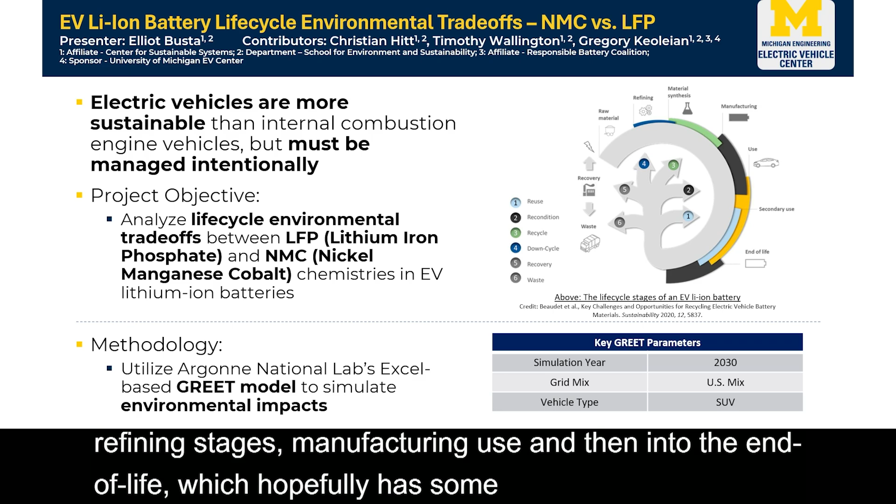So we're looking at, when you stack all of those things together, what does that mean in terms of the environmental impact? We use Argonne National Lab's Excel-based GREET model to simulate these. And here are a couple of key parameters that drive the conclusions that I'll show in this next slide.

So preliminary results in terms of greenhouse gases, you can see on your right, I've got at the top a chart showing the different chemistries across the bottom. So LFP and then different atomic ratios of NMC. And the first thing that we notice is that LFP has lower vehicle cycle impacts. This is the various manufacturing, mining, and refining stages impacts, but it has higher use phase impact.

And the reason for that is because while LFP has lower emissions in the mining and refining stages, it's a less energy dense material. So you need to manufacture more of it, and then you need to cart around more of it when you're driving your car, which leads to lower vehicle efficiency.

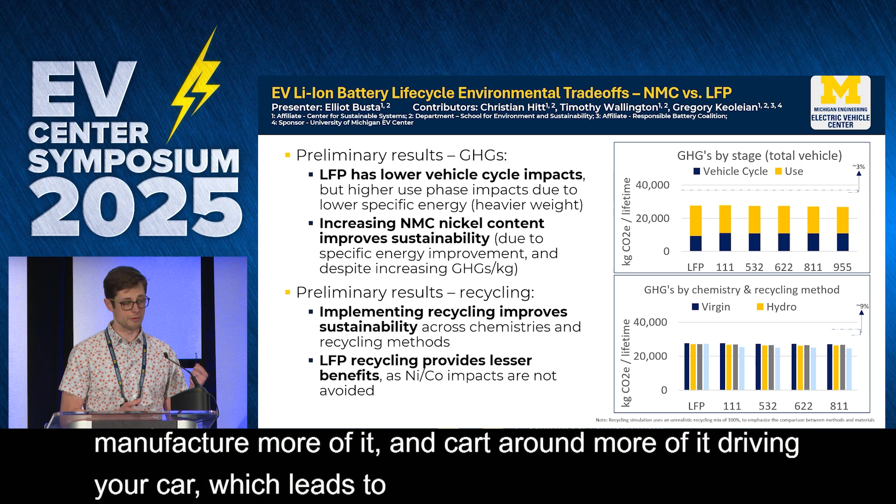The other thing that we found is that as you increase the nickel content in your battery, you actually get improved sustainability. And this was a bit of a surprising finding for us because nickel mining and refining is an emissive process.

And so you would expect that as you increase the thing that has a lot of emissions, you don't get a more sustainable process. But what's actually happening is as you increase the nickel content, you get higher energy density, and that leads to producing less material and moving around less material. And so with moving around less material and producing less material, that overwhelms the emissions aspect of the nickel mining and refining.

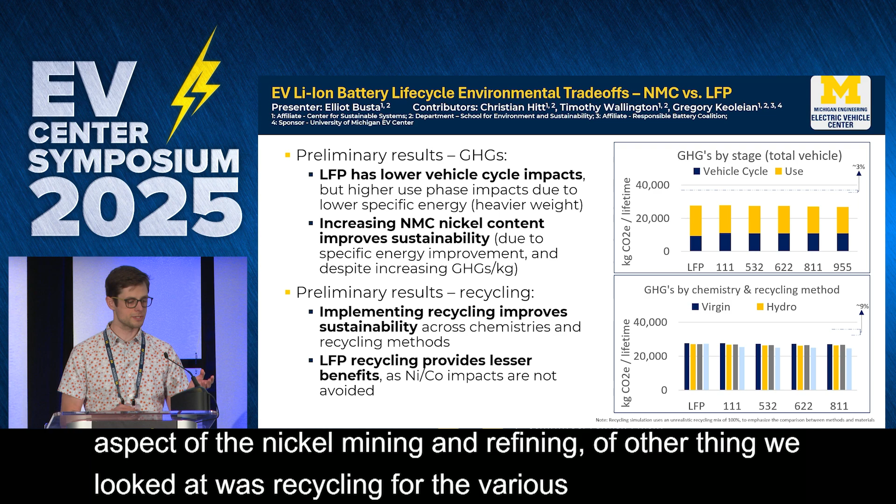The other thing that we looked at is recycling for these various chemistries and for a couple of types of recycling. So I think my legend got cut off there, but these are virgin in blue, hydrometallurgical recycling in yellow, pyrometallurgical in gray, and then direct recycling in light blue. And so what we find is that implementing recycling improves the sustainability across these different methods and chemistries.

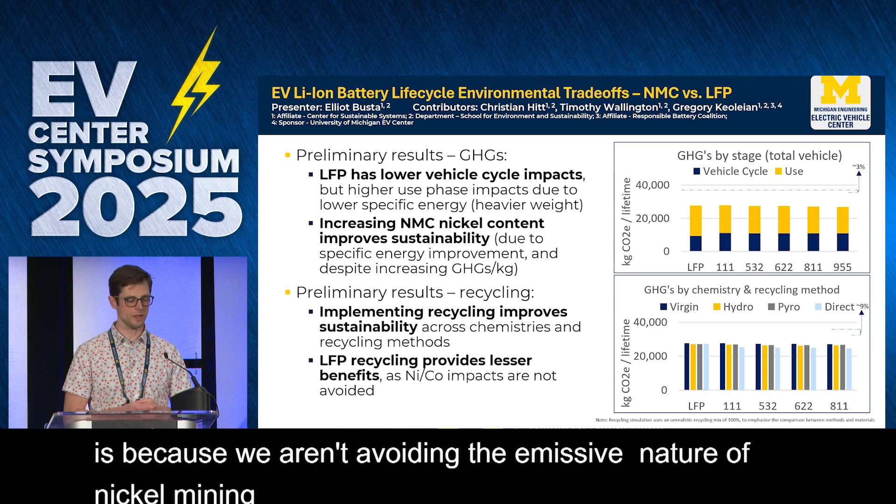And then another thing that you can see is that LFP recycling provides a lesser benefit. And this is because we aren't avoiding the emissive nature of nickel mining and refining, whereas with the NMC chemistries, you are avoiding those. So that's a benefit of implementing recycling there.

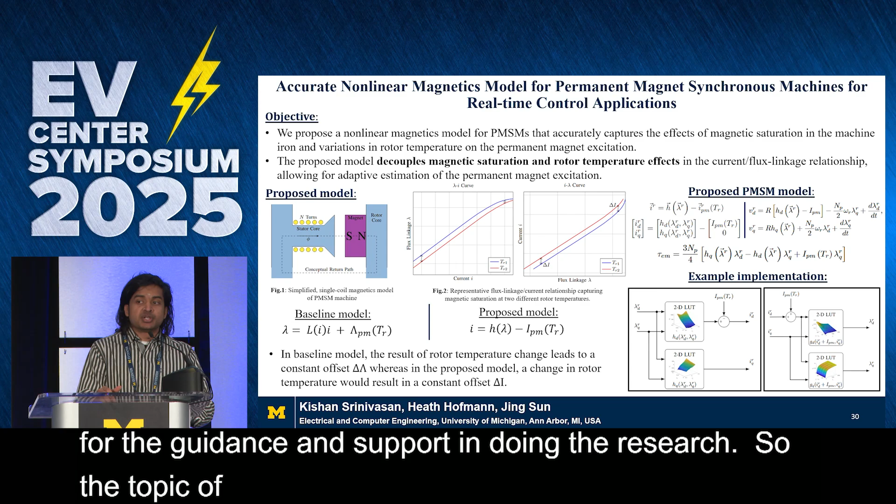So the topic of my talk is accurate nonlinear magnetics model for permanent magnet synchronous machines for a real-time control application. The objective of this project is to come up with a nonlinear magnetics model for permanent magnet synchronous machine, aiming for a real-time control application, capturing the nonlinear behavior due to magnetic saturation and temperature variation of the permanent magnet on the rotor. The main contribution of this model is the decoupling of the magnetic saturation and rotor temperature variation.

Looking at the proposed model itself, looking at the simplified single coil permanent magnet block diagram, the conventional way to model a permanent magnet is to model it as a flux linkage source, which varies with its temperature. What happens when you model a permanent magnet as a flux linkage source is that for a change in rotor temperature, you get a constant offset in flux linkage.

But when you look at the actual nonlinear flux linkage current mapping relationship, especially in the nonlinear region, when you experience saturation, for a change in rotor temperature the offset is no longer constant in flux linkage. So what we propose is to model the permanent magnet as a bound current source, which is again a function of rotor temperature. And what our proposed model predicts is for a change in rotor temperature, there's a constant offset in current, and that's what we observe when we look at the nonlinear current flux linkage relationship. There's actually a constant offset in current.

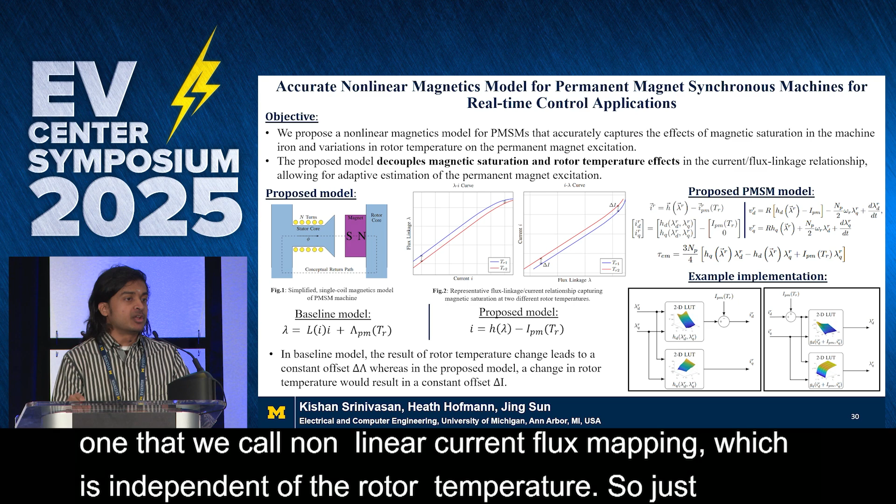Another main contribution is there are two components to the proposed model. One is what we call the nonlinear current flux mapping, which is independent of the rotor temperature, so it just captures the saturation behavior. And then you have the permanent magnet parameter, which is solely dependent on the rotor temperature. So we're able to establish a decoupling between the saturation and the rotor temperature in the flux linkage current relationship. This helps us to have an accurate adaptive estimation of the permanent magnet excitation without additional use of sensors.

An example implementation is shown here on the bottom right figure to illustrate how computationally inexpensive this model is. When you want to implement a flux linkage to current mapping, you have a two-dimensional lookup table, which is the current flux linkage mapping in our proposed model; once you characterize the machine, it becomes a constant that captures the saturation behavior. And then you can have an adaptive estimation technique to estimate the permanent magnet current.

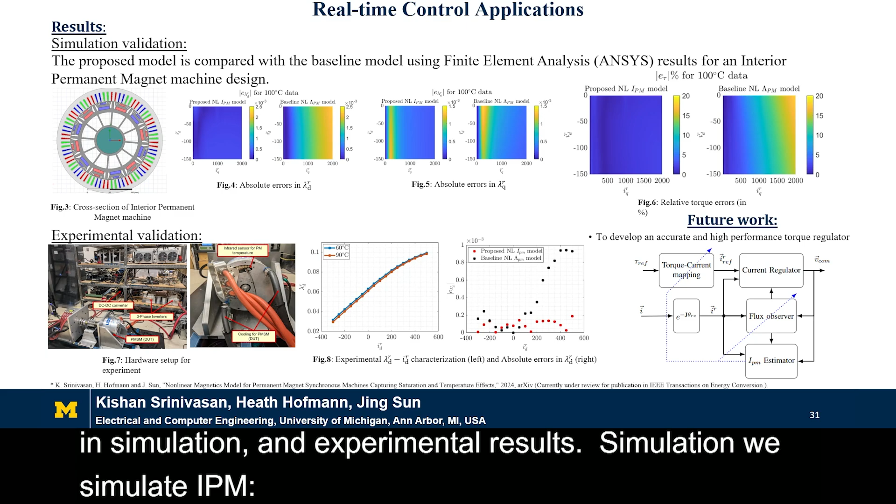In terms of validation, we validate the proposed model both in simulation and experimental results. In simulation, we simulate an IPM, interior permanent magnet machine, using ANSYS and show how the conventional model, which models a permanent magnet as a flux linkage source, predicts the torque and how our proposed model predicts the torque.

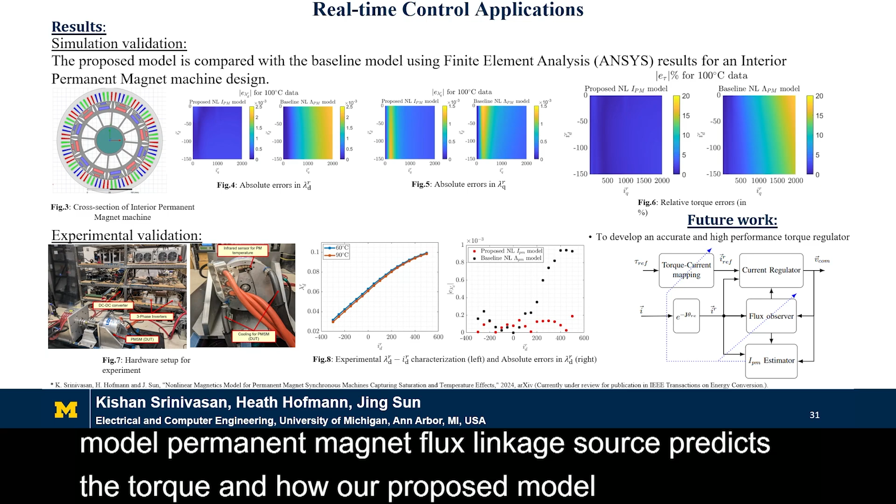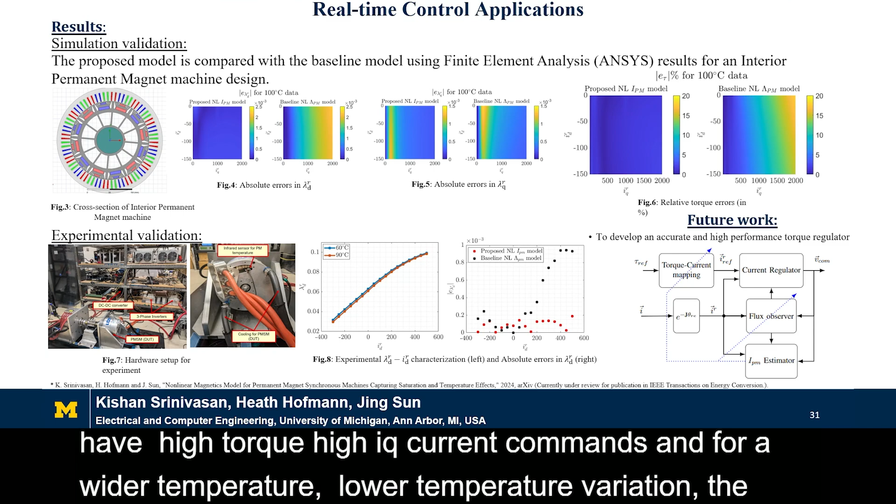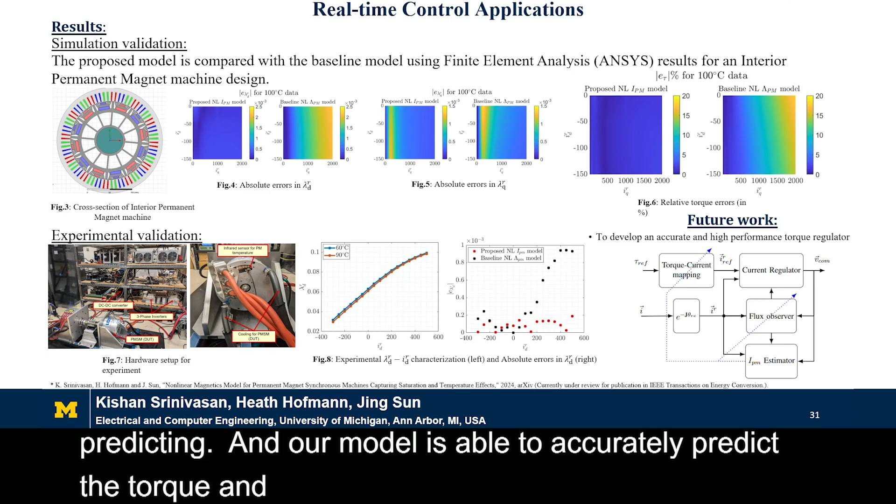And what we see on the plot on the right, especially when you are experiencing deep saturation, when you have high torque, high IQ current commands, and wider rotor temperature variation, the conventional model has a higher degree of error in predicting the torque, whereas our model is able to accurately predict the torque, primarily because of this decoupling of saturation and rotor temperature variation. We also have experimental validation showing the same accuracy of the proposed model compared to the conventional model in literature.

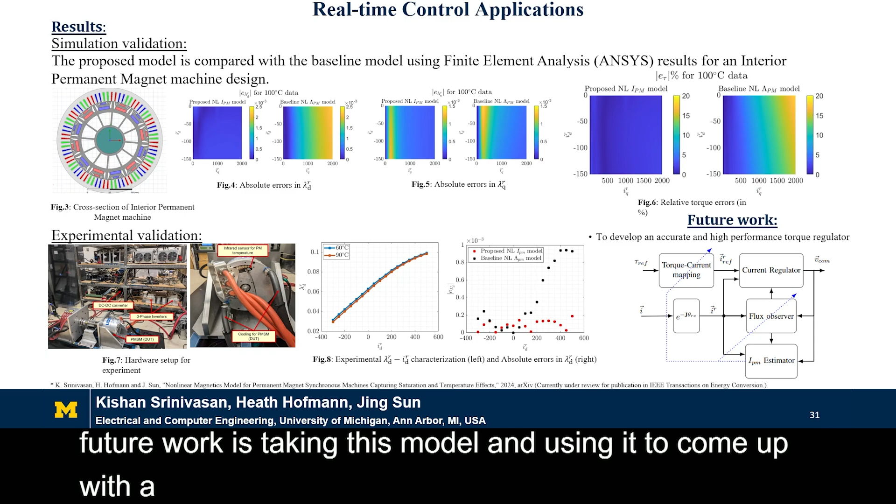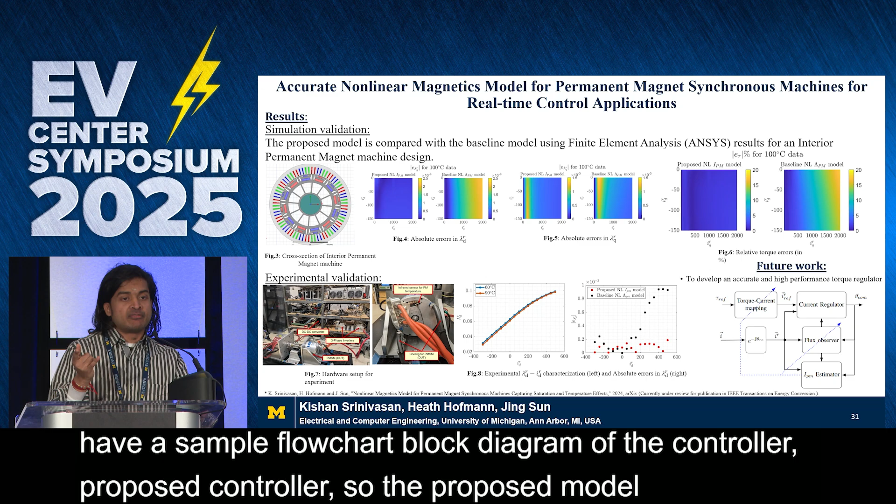The future work is taking this model and using it to come up with an accurate high-performance torque regulator. I have a sample block diagram of the proposed controller. The proposed model will be leveraged for an accurate torque to current mapping, reference commands, adaptive estimation of the permanent magnet, and also building an accurate flux observer.

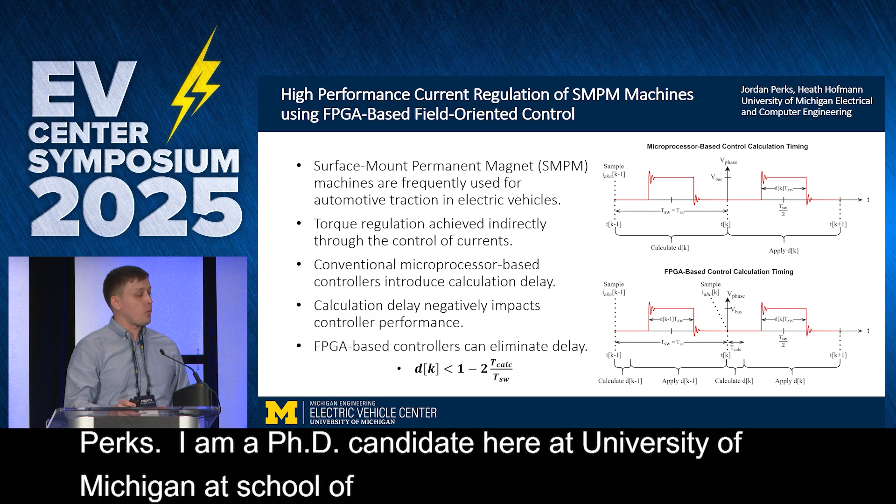I am a PhD candidate here at the University of Michigan in the School of Electrical and Computer Engineering. My faculty advisor is Professor Heath Hofmann, and my research is the high-performance current regulation of SMPM machines using FPGA-based field-oriented control.

So to unpack the title a little bit, surface mount permanent magnet machines, or SMPM machines, are very frequently used for automotive traction in electric vehicle applications. In general, the control objective for these types of machines is the regulation of torque, but this is often achieved indirectly through the control and regulation of currents.

Now, the problem that we're trying to solve is that in conventional microprocessor-based control applications, we see a significant introduction of calculation delay. And this calculation delay has a very negative influence on controller performance. To understand where this calculation delay comes from, we have this figure here on the top right, showing the typical microprocessor-based control calculation timing.

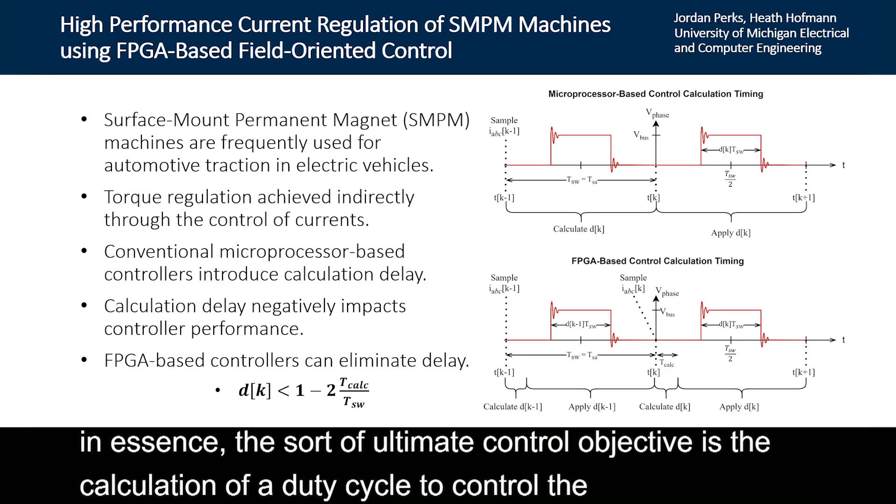In general, when we are supplying power to a SMPM machine, we are doing so with an electric drive, and we're utilizing pulse width modulation to supply the voltages and currents that the machine requires. So in essence, the ultimate control objective is the calculation of a duty cycle to control that pulse width.

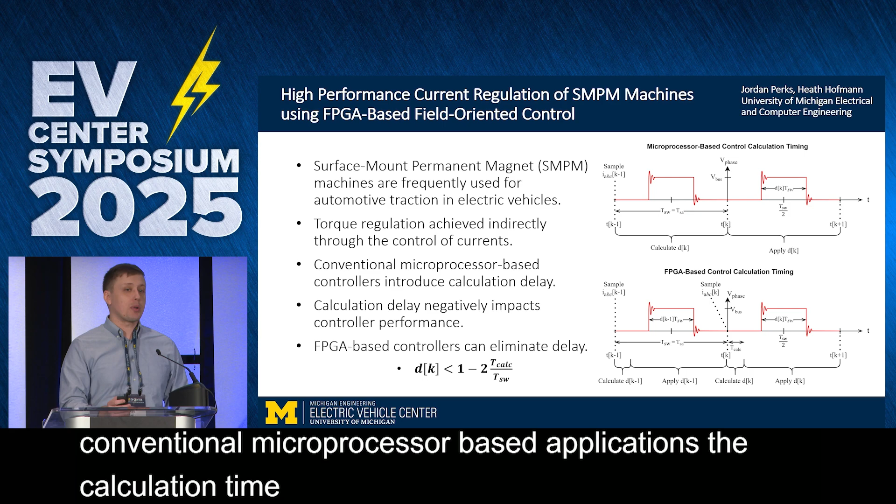What typically happens is we sample the current, we perform all of the control calculations necessary to determine the duty cycle, and then we apply that duty cycle. But in conventional microprocessor-based applications, the calculation time ends up being quite substantial. By the time you're able to apply that duty cycle, enough time has passed that you're actually using data from the previous step's sampled data. This ultimately results in at least one sample period of calculation delay.

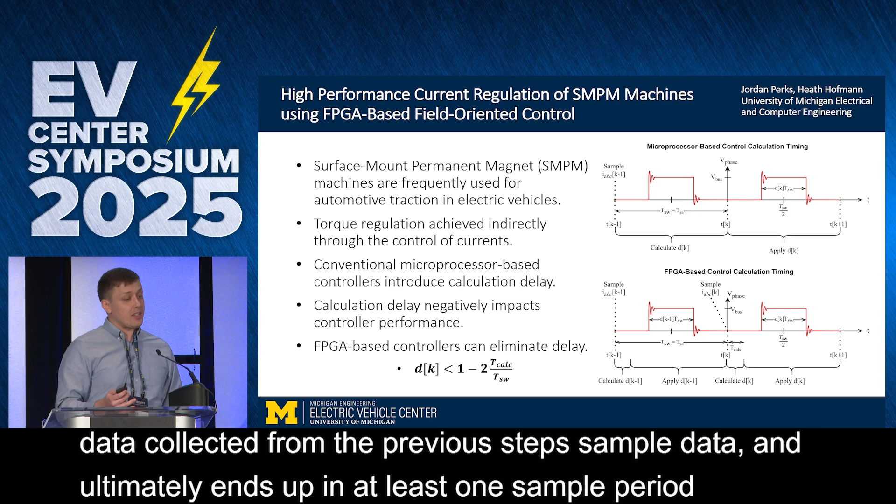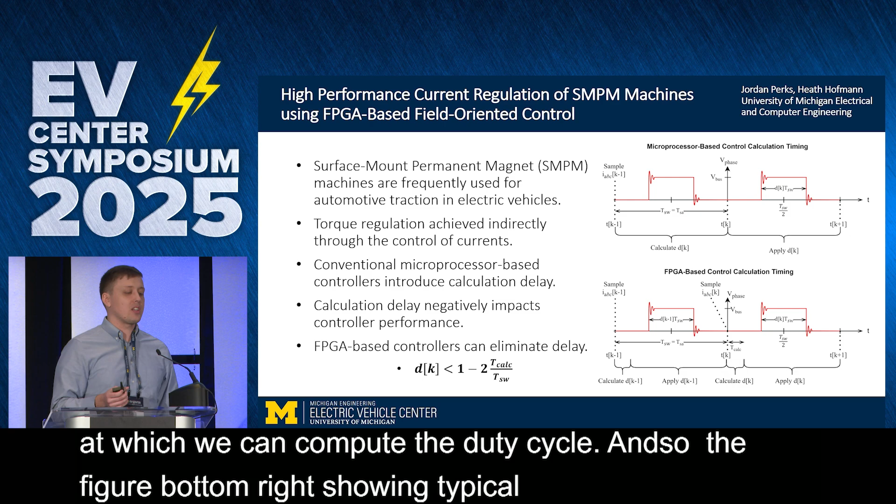So the objective of this work is to implement a controller on an FPGA, field programmable gate array, to perform many fixed point control calculations in parallel in order to accelerate the speed at which we can compute the duty cycle. The figure on the bottom right is showing typical FPGA-based control calculation timing. The idea here is we want to shrink that calculation time as much as possible.

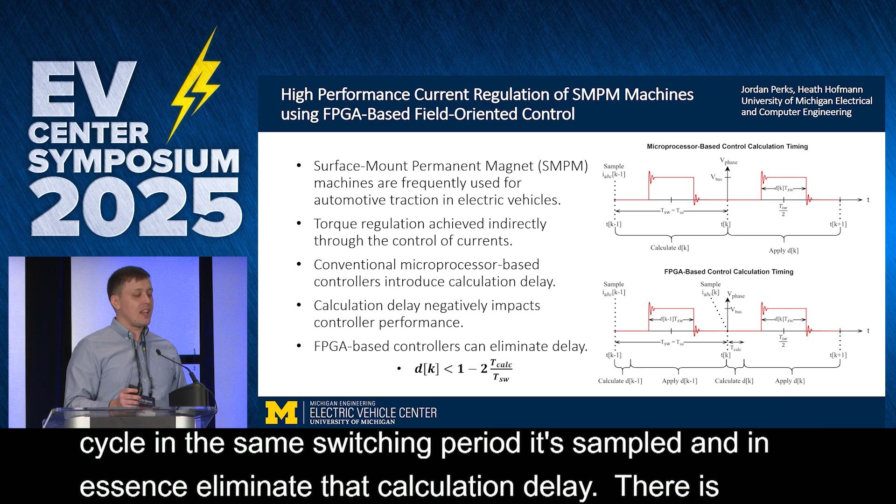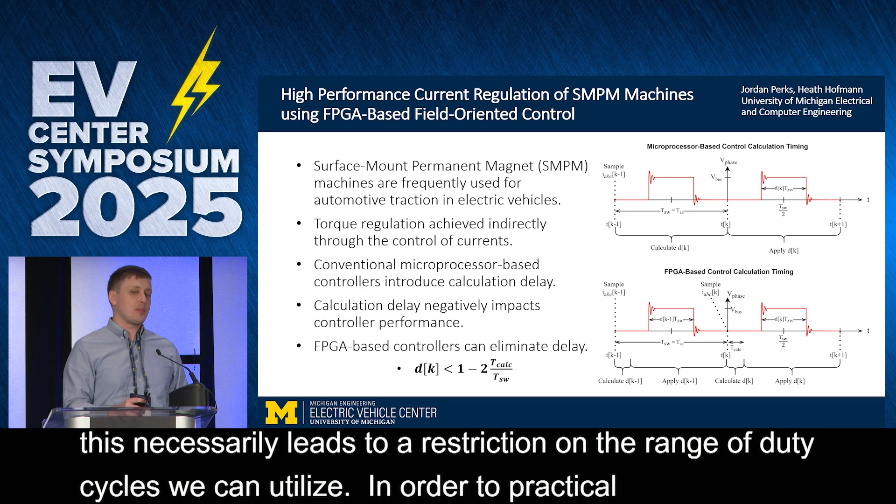If we can get the calculation completed before we issue the duty cycle pulse, the hope is that we can implement that duty cycle in the same switching period that it is sampled and in essence eliminate that calculation delay. But there's one minor catch: we have to be able to perform this calculation before that duty cycle pulse is issued. This necessarily leads to a restriction on the range of duty cycles we can utilize, so we need to reduce that limitation by reducing the calculation time as much as possible.

The proposed controller on the top left is a typical field-oriented control of an SMPM machine that we've modified in order to accelerate the calculation time. It consists of a disturbance rejection and integral control term, shown in this slow calculations block, and a proportional and state feedback term shown in this fast calculation block.

The idea is if we can implement the calculations that take the fewest amount of time to compute quickly and issue that duty cycle command, then we can eliminate delay as much as possible. And the slow calculations, we can allow them to be delayed. We can use delayed information with them combined with the fast calculations, so that way we're not holding up the entire controller on the slow calculations.

When we implement the controller in this way, the figure on the right shows a step response of the current. You can see that the conventional delayed controller has significant performance issues with overshoot, settling time, and cross-coupling. It also shows the ideal regulator in green and the proposed regulator in blue, and you can see that they are almost right on top of each other.

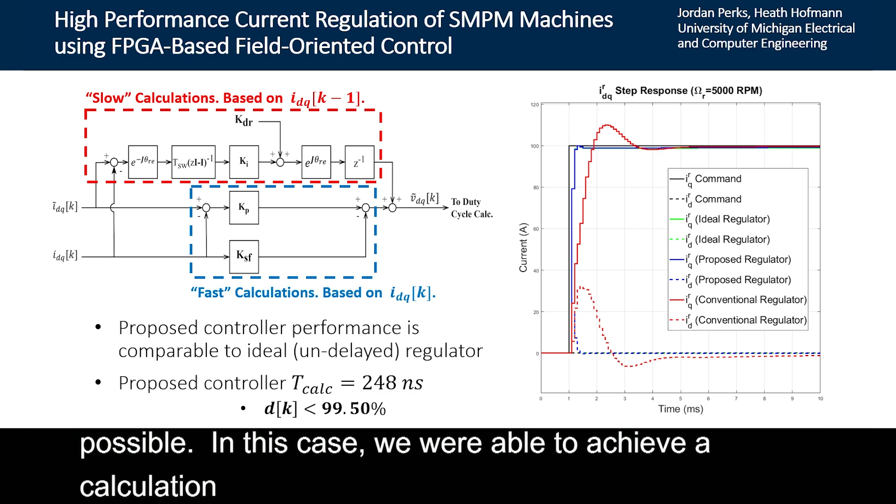So the conclusion here is that the proposed controller is able to achieve very comparable performance to the ideal undelayed regulator, while minimizing the calculation time as much as possible. In this case, we were able to achieve a calculation time using the hardware in our lab of 248 nanoseconds, and that corresponds to a duty cycle limitation of 99.5%.

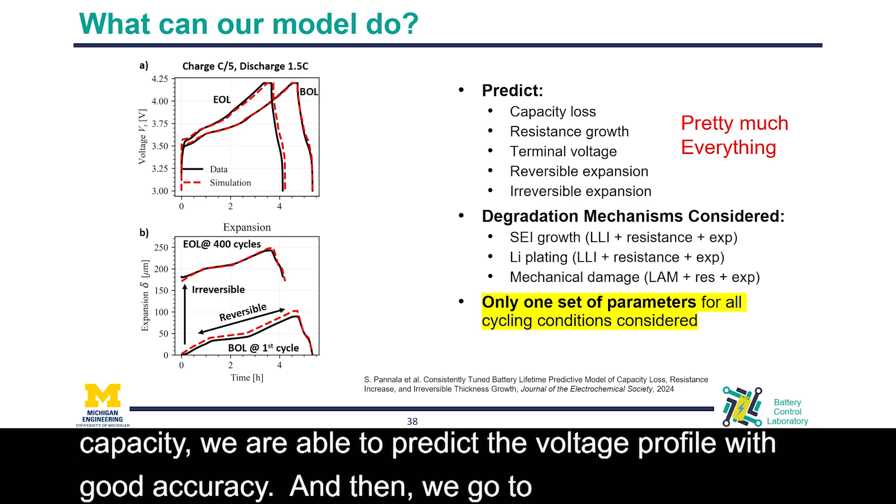So what can our model do? It can predict capacity loss and resistance growth. Why do you want both? Only if we can predict capacity and resistance can we predict the voltage profile. As you can see on the top left, we have two voltage profiles, one at beginning of life, another at end of life. If our model is able to capture both resistance and capacity, we are able to predict the voltage profile with good accuracy. And then we go to reversible expansion within a cycle and irreversible expansion between fresh cell and end of life. If we are able to capture that, we can predict total battery thickness throughout the life.

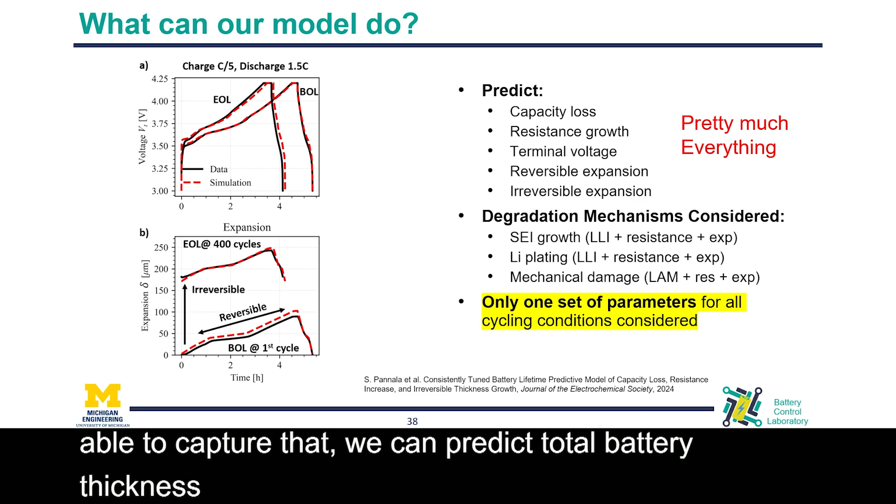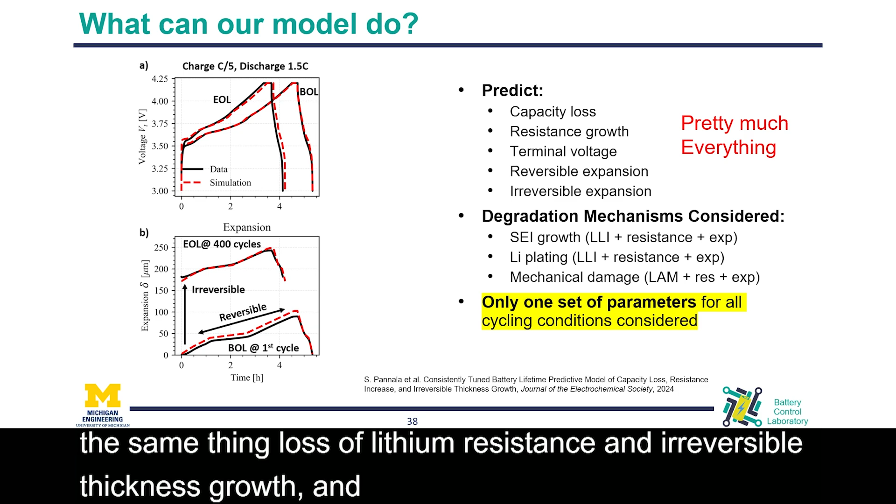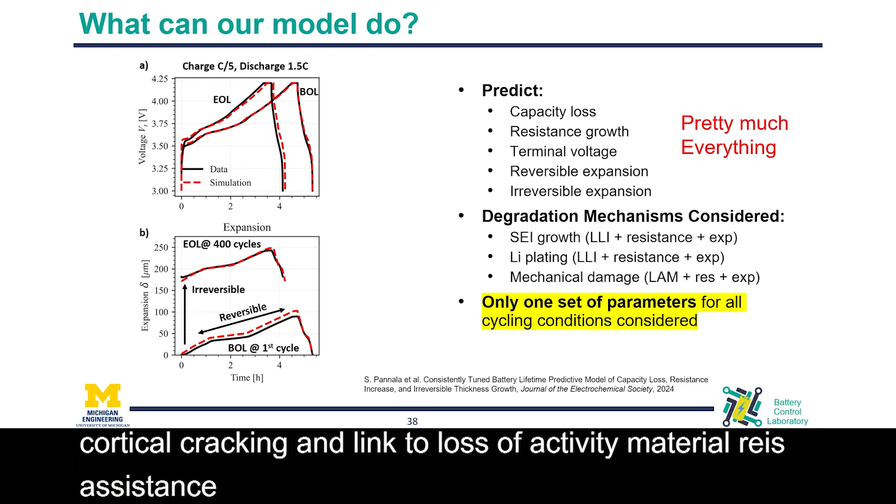So how do we do it? We do it by considering these three degradation mechanisms and link them to observed changes. The first one is SEI growth, which we link to loss of lithium, resistance growth, and also irreversible thickness changes. Lithium plating, the same thing: loss of lithium, resistance, and irreversible thickness growth. And finally, we have mechanical damage or particle cracking, which we link to loss of active material, resistance growth, and also irreversible expansion. One good thing about this model is we have taken 6 cells at room temperature, and just one set of parameters can capture a wide variety of cycling conditions, including different C rates, different depth of discharge, and different charge and discharge conditions.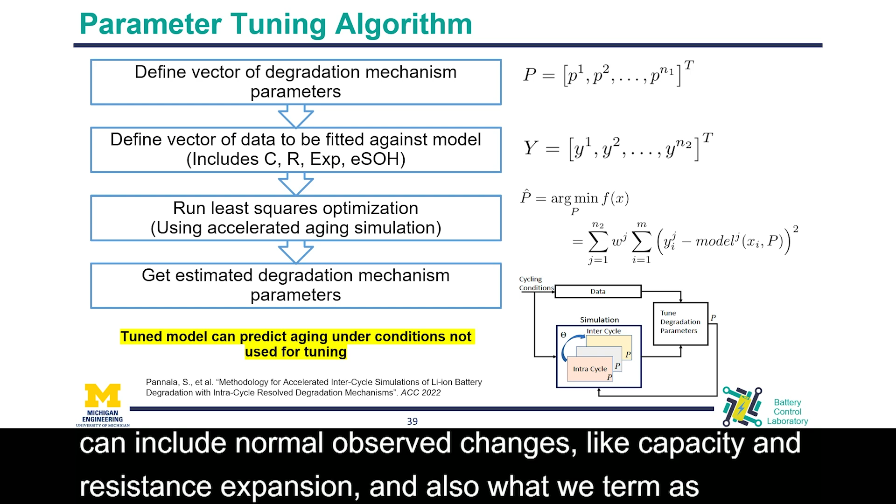So how does it work? We have a model, we have data, so we have to connect both of them. First we define a vector of degradation mechanism parameters. I've shown you what the mechanisms are. Depending on the data we want to use, we tune a subset of them. Then we define the data to be fitted against the model. This can include normal observed changes like capacity, resistance and expansion, but also what we term electrode state of health, which gives more insight into the degradation modes. Then we run least squares optimization, which we enable using accelerated aging simulations, and finally we get estimated degradation mechanism parameters. So our model can predict aging under conditions not used for tuning. That's an advantage of being a physics-based model.